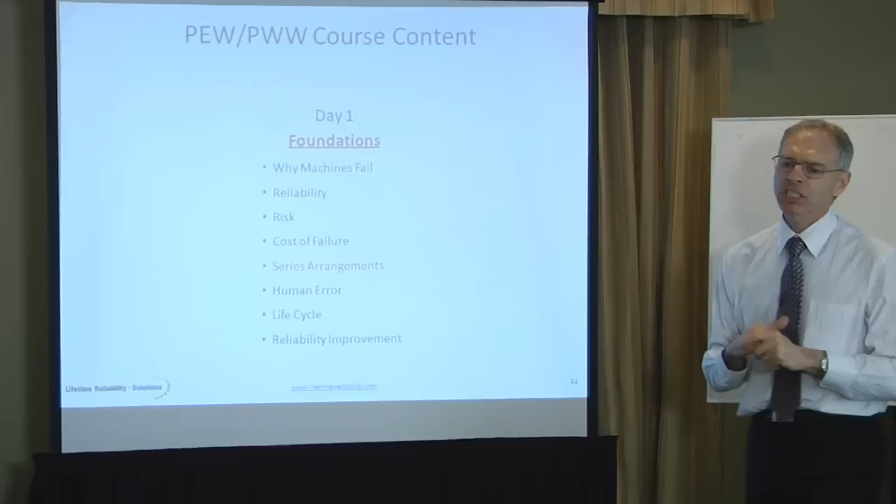I'd like to think that Plant Wellness might do it in 2 or 3 years. That's the thinking in my mind. To have a strategy where when we do these things, the right things are done and they're taught and picked up on quickly, because we can make the change quickly. So that's one of the things that Plant Wellness offers companies, is a rapid change to best practice, and not the 8 years that it can take if things are done haphazardly.

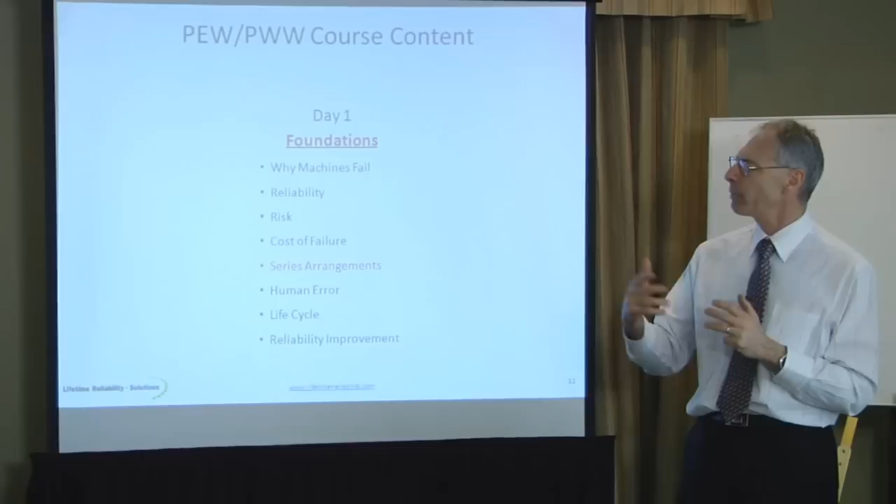This one here is, I guess, an enlightenment to me when it finally sank in, only a few years ago. I'm 56 now. I was 49 when I began to say, well, this isn't working, let me look at some other answers. It's taken me a number of years to get this clearer vision of what we want to see happen. And this one here about series arrangements was one of the keys as to why we are so unsuccessful in changing to good practice at the moment.

So I'm going to talk a little bit about reliability engineering and hopefully fairly simple concepts. This is a series system. A series literally is one thing after the other. So in this particular arrangement here of our pump, for this pump to pump liquid, the motor has to work, the coupling has to work, the pump has to work. I've got a system of equipment, so I've got a series, the whole three have to work. And of course, there's a base plate missing and a foundation missing and hold down bolts missing, so there's more to this system of a pump set to get the whole thing to work, but it's a series arrangement.

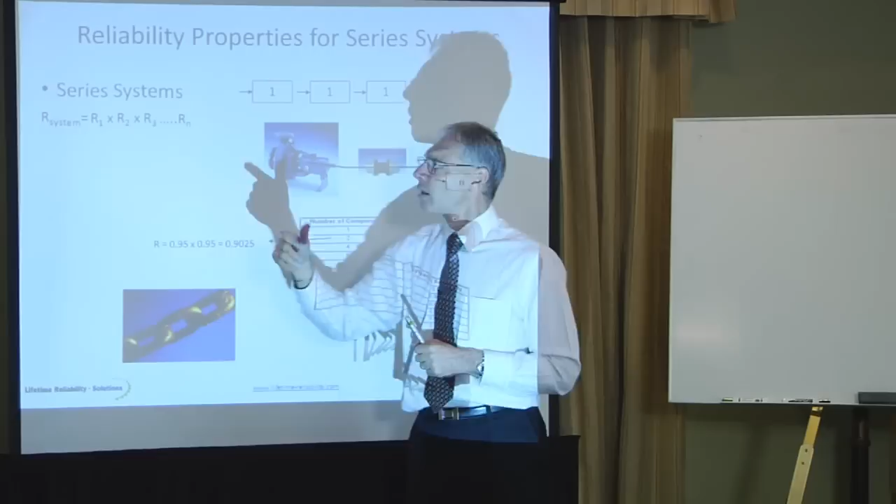Now, the chance of this whole system working depends upon the individual parts. This system requires at least these three to work. So the chance for the system to work is the chance of part 1 working, component 2 working, component 3 working, or assembly 1, assembly 2 and assembly 3. It depends how you want to look at this. I can break this down into components and it'll be the same concept, the same mathematics applies. Reliability, remember, is the chance of success. To have the system success very, very high, I've got to have every single component and assembly in the system even higher, because it's the chance of the whole system working as one that makes the system work completely.

So I've put some numbers in there. As an engineer, numbers tend to clarify things for me. So here we've got a number of components. One component is 0.95 reliable. Which means out of 100 times we go to use this thing, 5 times it doesn't last as long as it should do, 95 times it does. So I roll the dice and 5 times it fails and 95 times it's successful. Reliability is a measure we can get from the historical success or failure of an item of equipment.

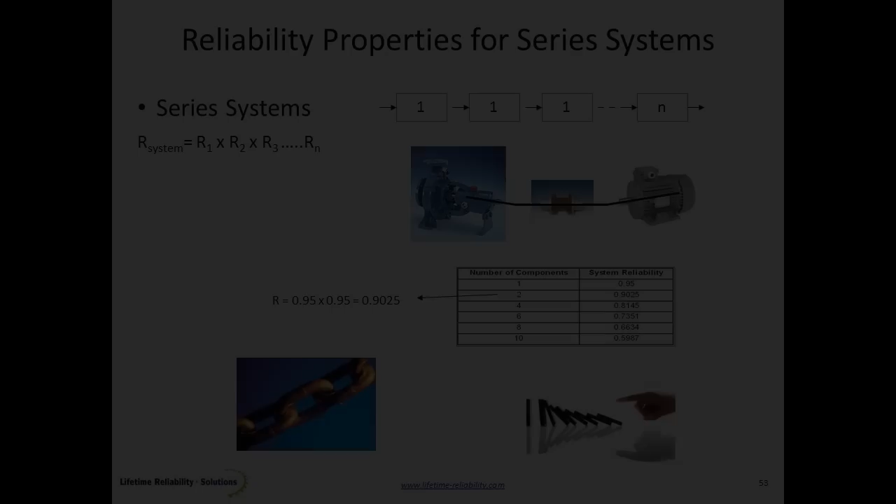When I put 2 together, so I create a system of 2 now, so I need both to work as a pair for the thing to work, now I'm down to 0.9 reliable. So my system of 2 is not 0.95, it's now 0.9. If I have 4 in a series, I'm at 0.81. If I've got 10 in a series, I'm down to 0.6 reliability. Now this can be your production process, machine 1, machine 2, machine 3. It can be an assembly, component 1, component 2, component 3. It can be the parts, part 1, part 2, part 3, part 100 if need be. So the more I string together, the less and less reliable the system is, because any of these can fail.

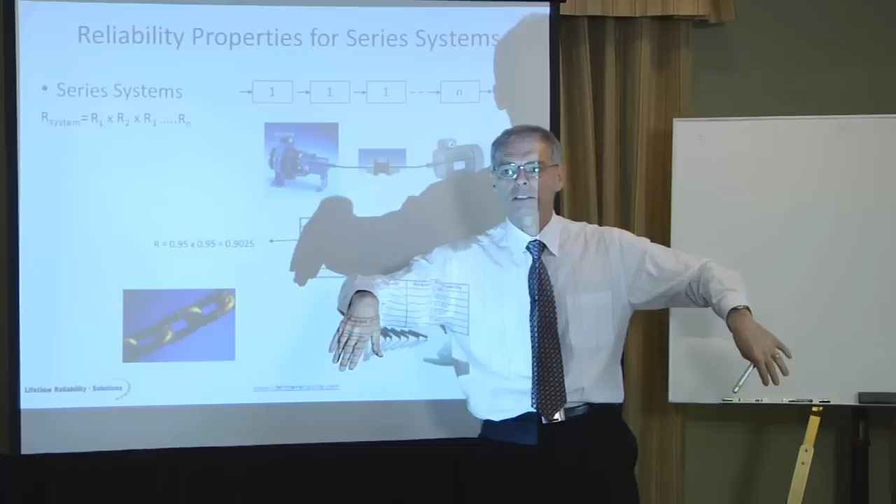Very much like this, my domino: one item fails and the whole system stops. It's a big long chain, links in a chain. One link breaks, the chain fails. Same logic here: if that fails, doesn't matter, it's gone to zero. The whole system is unusable.

Now with a system, there are some properties that are worth understanding. I'm going to work on this a little bit, so bear with me. I'm going to use some maths just to highlight some of the issues. There's 3 key properties that we work with in plant wellness.

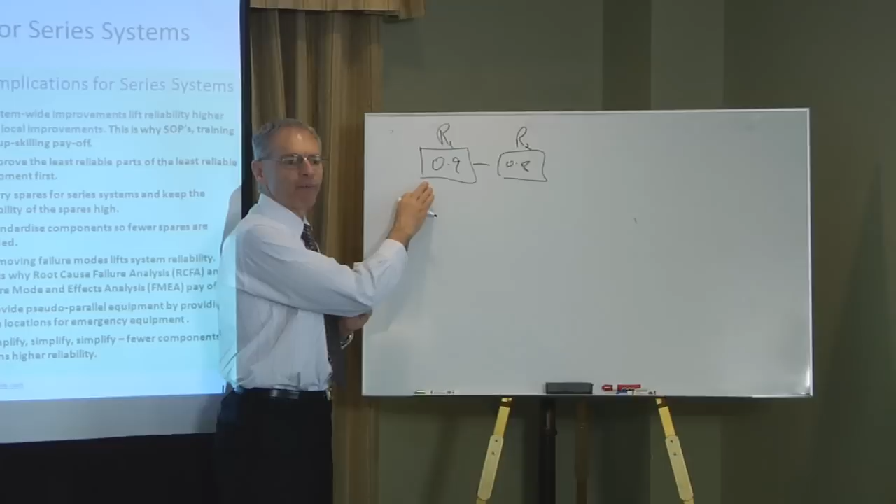The first one is the reliability of a series system can be no higher than the least reliable component. I'll throw some numbers up here: 0.9, 0.8, R1, R2. 90% chance of success, 80% chance of success. That's all it is - it's just the chance this might or might not happen.

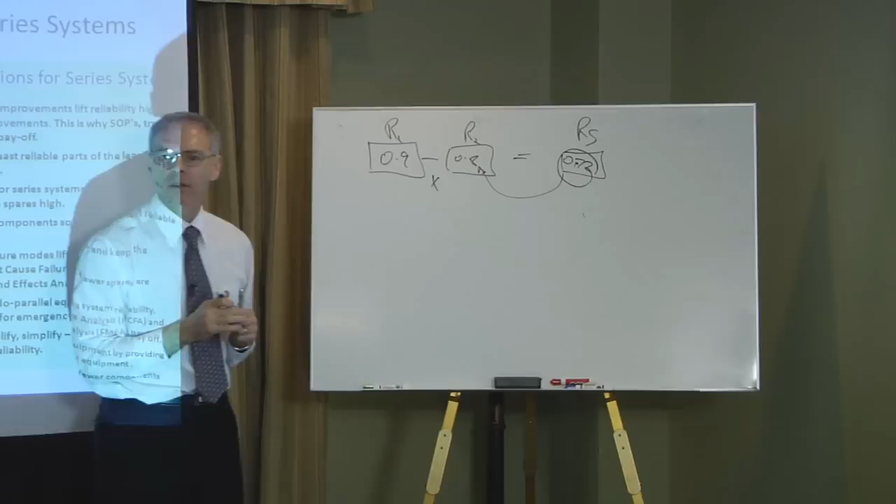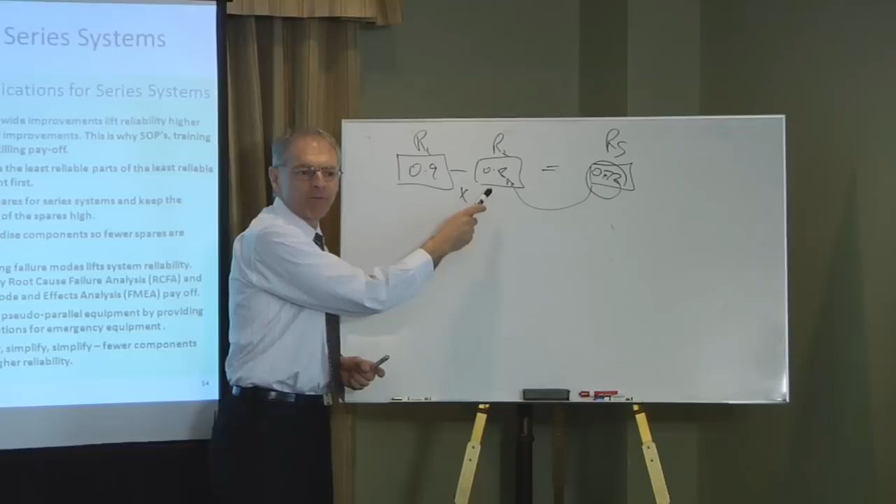So my system reliability is those multiplied together. 9 times 8 is 72, so my system reliability is 0.72, which is no higher than my worst. If I've got a big lot of machinery in my process line, it says to me, if I want to improve my process results, I've got to find the worst performing machine and fix it. Because if I can push this up to 0.9, now I'm at 0.81. Again, no higher than my worst, but I've improved the reliability.

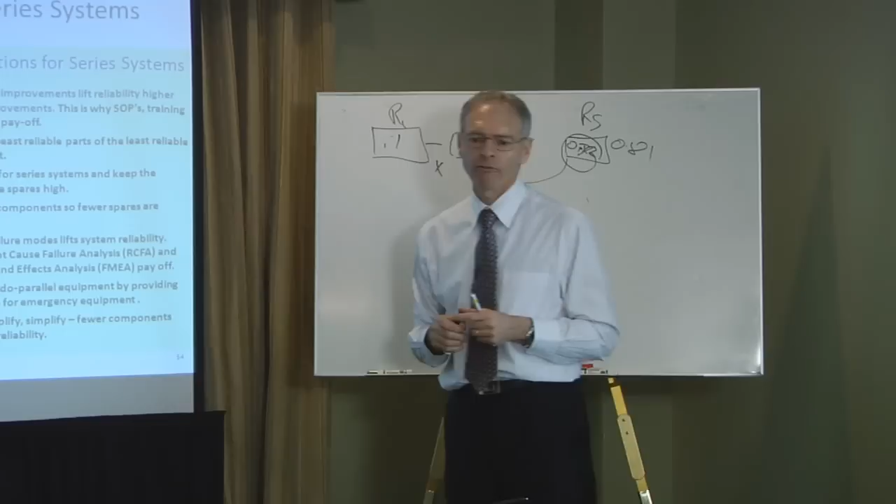So when I do root cause analysis, when I look for a problem in my machines, I want to go to the worst machine, my top 10 worst machines, and work on those to improve the business. Because it says very clearly, no point improving one up to perfect when another isn't touched - I'm going to work on the worst one. So in plant wellness, we go looking for where the worst trouble is, and solve that first, because that is where the payback is for the whole system.

Number 2: if we add more items into a series system - say we've got a system of 2 already, each at 0.9 reliability, and we add one more - the reliability of all items must rise in equal proportion to maintain the system's original reliability.

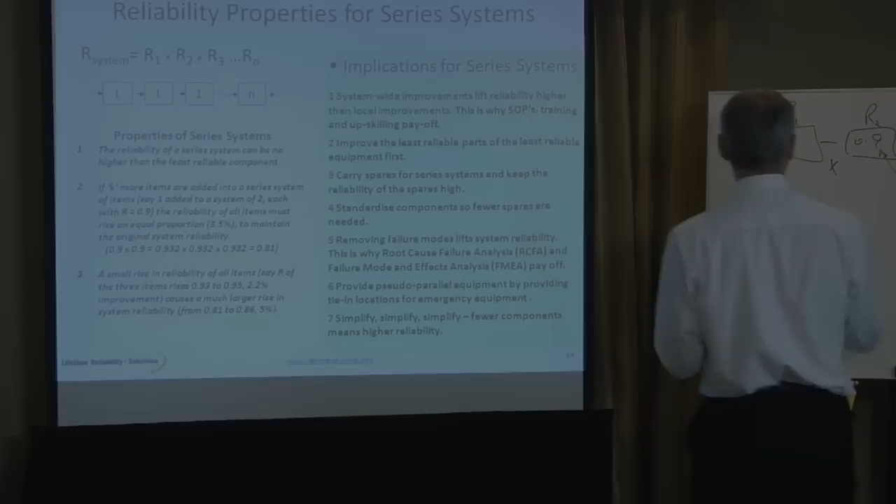So if we have 0.9, and I add in another one, 0.9, my system... 81 minus 7, it's about 0.73. It was 0.81 before. I've added one more thing in there, and as a system now, because all three have to work together, the system has reduced in reliability.

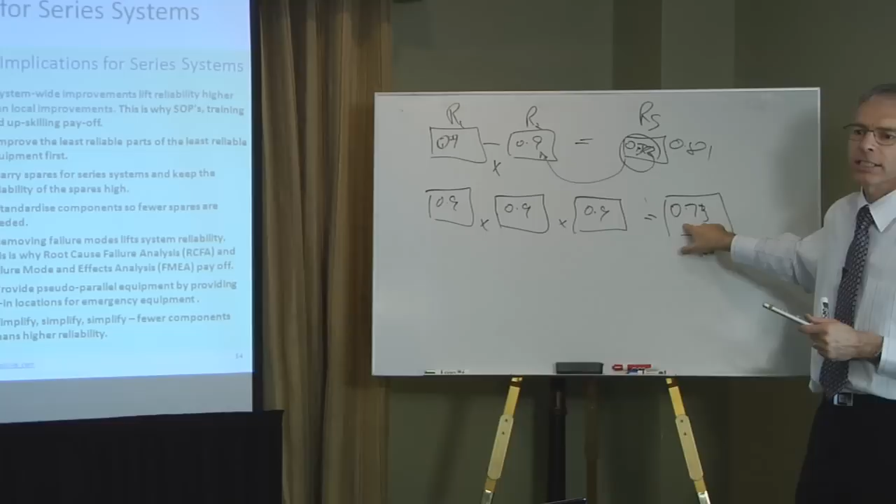If I want to get back to 0.81, I actually have to make all of these 0.93, 0.93, 0.93 to get back to 0.81. So I was at 0.81, I added something into the system, it dropped reliability. Now to get back to 0.81 where I wanted to be in the first place, I've got to lift all of these as well. So I don't want to be adding things in - if I add things in, the chain gets longer with more links, and of course they're going to fail.

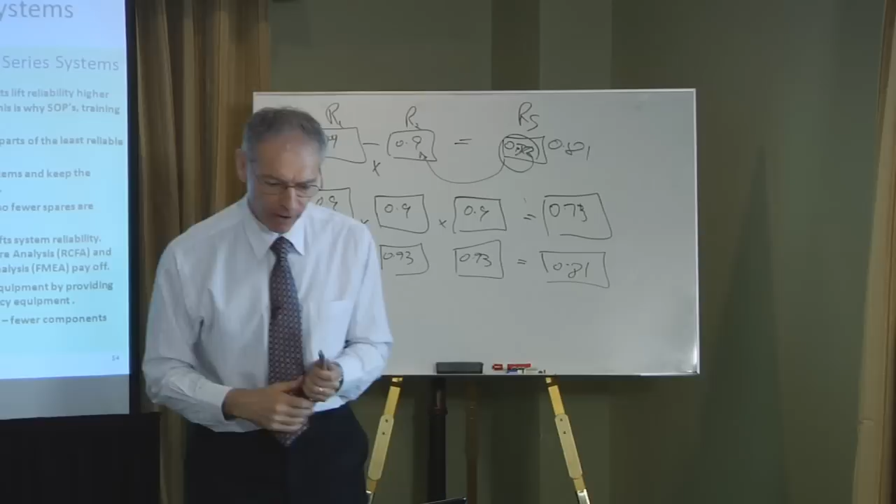I think if I can go to the next... no, I haven't got that one there, wait a sec. No, haven't got that, that's okay. That's one of the slides I might add into this example.

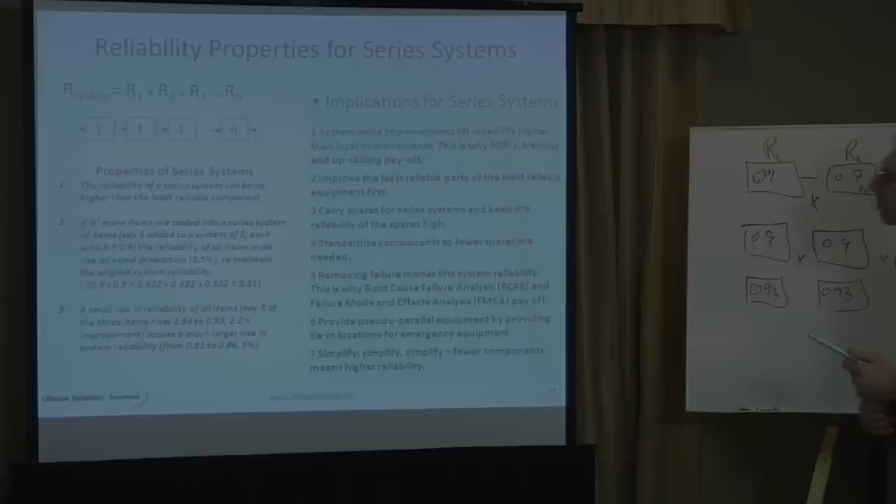The third one is the one that's really, really interesting. A small rise in reliability of all items - say we're at 3 items at 0.93 and we go up to 0.95, we can lift each up to 0.95 - causes a much larger rise in system reliability.

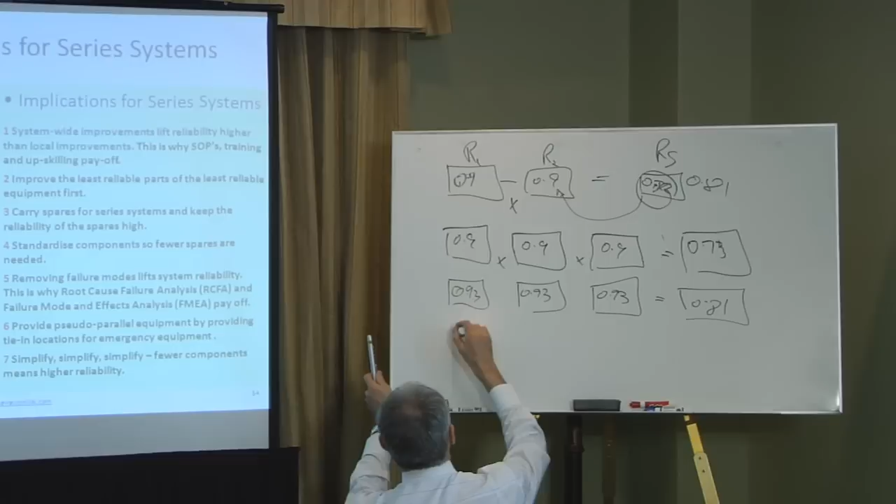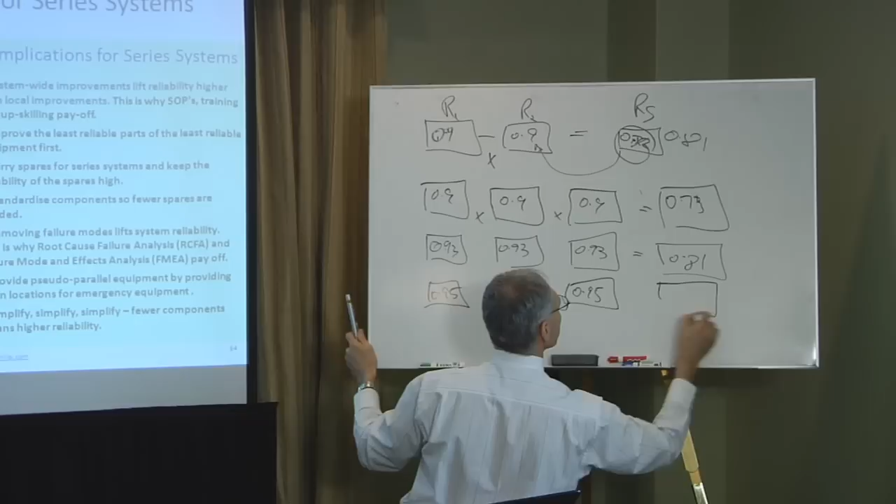Now bear in mind, I have no idea what causes this reliability to rise - whatever it is that improves it is good to do. If we can go 0.95, 0.95, 0.95, if I can make that happen, increase reliability, then this one here goes to 0.86.

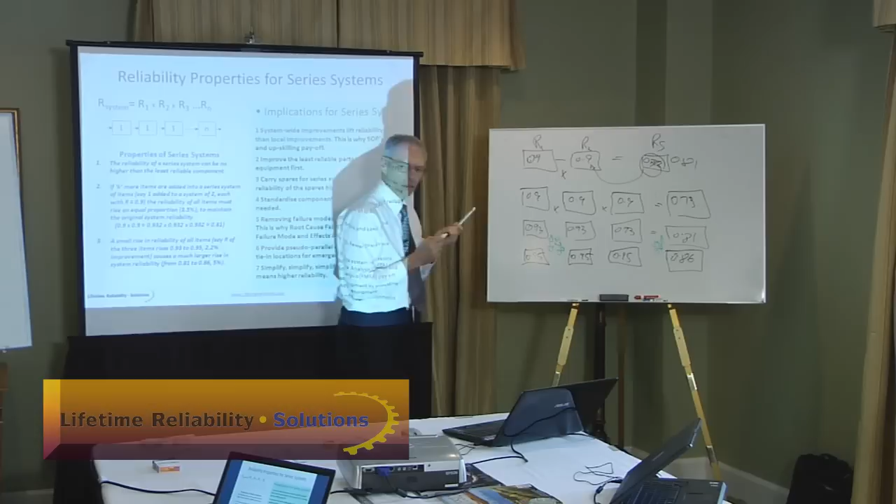This change is 2.2%. This change, I think, is 5%. Yeah. It says to me, hey, there's free money here. I put in 2.2% effort, I get 2.5 times return.

Because I'm changing the entire system as one complete unit. And the mathematics is very clear - this isn't me making this up, the numbers are very clear. The proportionate rise at the individual component level is much less than the total delivery of the system.

So the system improves a huge amount if I can create a global change. If I can create a global change across my company in one fell swoop, I will make absolute fortunes for very little effort. The question now becomes, what are the global changes we can do that will do that sort of thing?

Well, let's introduce precision maintenance. In the boardroom, the CEO's there with these execs, and we all say, guys, the company's now going to introduce precision maintenance. We saw before, if things are unstressed, if the stress is right down low at very low levels, we're going to create reliability. We're going to have far more cycles to failure than we had before. So the boardroom now does that, a global change. Let us introduce lubrication management.

Every single gearbox, every single differential, every single hydraulic system, lubrication management. We're going to have world best lubrication management practices. Global change. Everybody gets trained up into proper lubrication management practices, good storage, no water contamination, removing wear particles, getting right down to very high quality conditions. So that decision across the years, every gearbox is protected, every hydraulic system is protected, every differential is protected, all by decision. So this is the stuff that plant wellness works with.

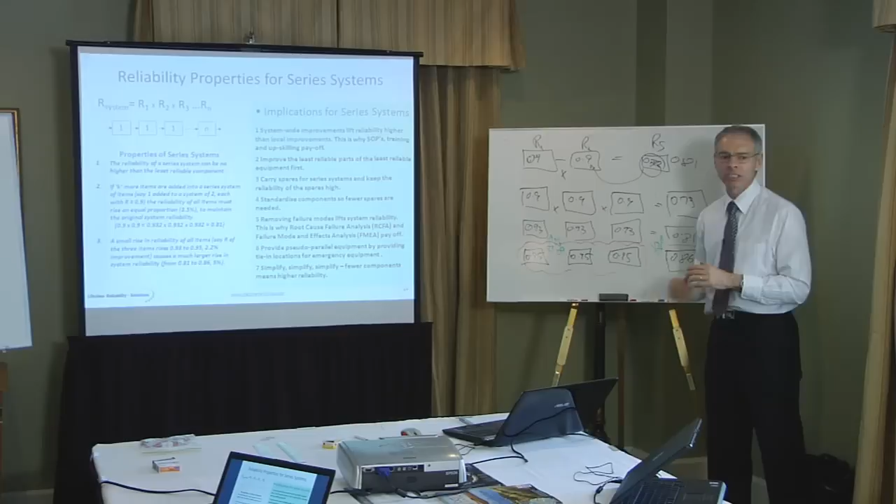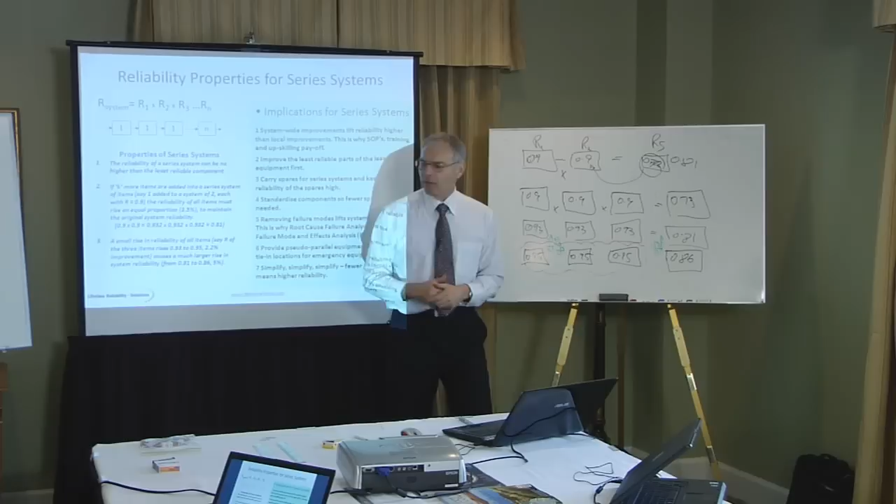Stop doing things that don't work. Do the things that do work. Teach your guys to do the things properly, correctly. Buy the machinery in, buy the instrumentation if you need to, because the payback is a fortune very, very fast. So yeah, that's something that didn't come to me until I was 52 years old, until I began building the course and began playing with what this plotting actually says.

In a series process, we have huge risk. Because if that goes wrong, system fails. That goes wrong, system fails. That goes wrong. I've got hundreds of things to go wrong. And I want to have none of them go wrong. How do I ensure none of them go wrong? Bring in world best practice across the whole operation. Then I'm going to get the right things happening, and the right things happening give me the right results, and the right results give me a lot of money. Thank you very much.

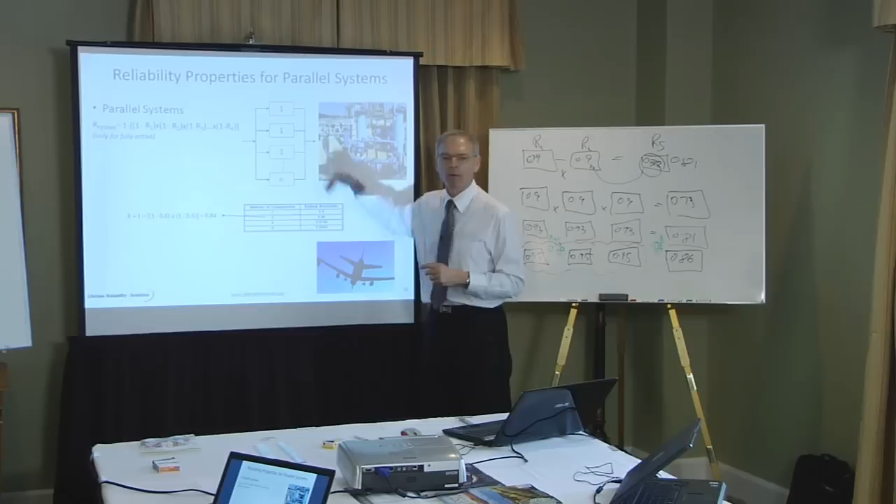The other way we have reliability is to have things in parallel. So in a parallel system, here we go, we've got a standby unit. So what we do in parallel is we have standbys. So in this case here, that one can do the whole job. If that one fails, that one takes over. So I have a backup. And in many process plants, you'll have standby pumps and standby machinery on purpose, knowing that if one goes down, we start the other one and the process keeps on going.

So somebody in the design phase thought about the concept of availability and the cost of downtime and said, no, I can justify putting in a standby because the risk is so great if we don't have it there. Now in this case, when I have a parallel arrangement, and again I throw some numbers in there because it's easier to see with some numbers. Here, 0.6 reliable. So one item is 0.6, and 0.6 is a disaster. 0.6 is absolutely atrocious. But I put 2 together, now I'm 0.84.

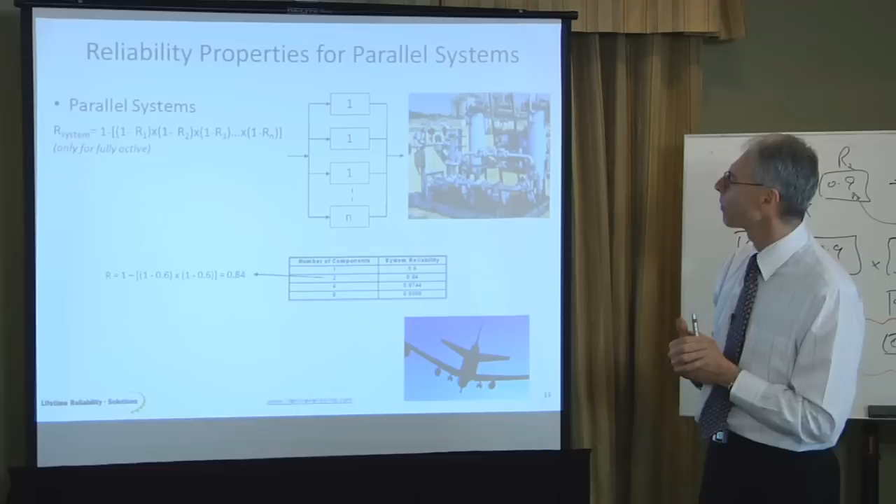I put 4 together, 0.97. I put 6 together, 0.996. So I can improve reliability by putting things in parallel. In the end, there's only 2 ways to improve reliability. One is to do things in parallel. The other way is to have each component very, very high reliability. And that's limiting, I guess, because there's not many things we can do to play with reliability. There's only a few options. Again, there's some things that come out of it in terms of basic implications.

We use parallel activities or parallel arrangements when the consequence of failure is high. When the risk is high of one item failing, we put a standby in because it pays for itself. It reduces the chance of the process going down.

We'd like to have things in parallel because it gives us options as to how to complete the process. You know, that machine goes down, that's okay. I can run it through this machine here. I can still stay in business even though I lose plant. The only hassle is that costs money. Now I've got to buy another one, maintain it, and keep it in good condition.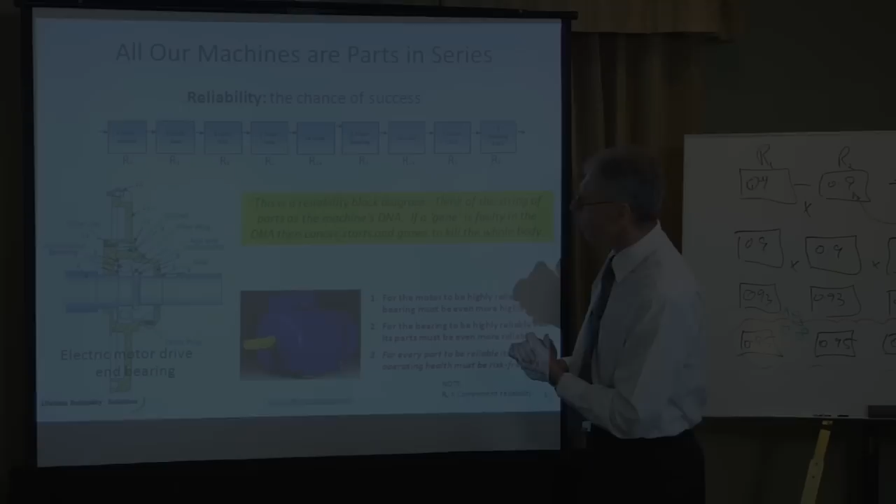Now what I've done here is I've taken the drive end bearing of an electric motor and turned it into what we call a reliability block diagram. It's a process chain. Power comes through, there's a shaft journal involved, there's a shaft seal involved, there's a lock nut involved that keeps this thing working properly. If that lock nut comes off, we're going to have troubles with that shaft moving up and down. There's an inner race on our bearing.

There's the lubrication, of course, between that inner race and the element. We have a rolling element, in this case a ball bearing. And again, we have lubricant on the ball bearing to the outer race. There's a housing bore. The housing's on the end cap, the end cap's on the frame, the frame's on a base plate. There's a whole chain here that I haven't actually put in there, but it's there. That might be, in the end, 50 components long.

That fails, that goes down. This thing's driving my prize machine, the machine that makes money for the company. I'm out of production. If that goes down, same story. If that goes down, same story. So if I've got 100 of these things in line, any one of which goes down, my machine goes down, my process goes down, business goes down. I have to watch out what causes these things to fail.

And that's why we focus so much on part reliability in plant wellness. I've got to make sure each of these is really, really high reliability. Lots of nines in a row, because that is the only way to ensure this thing will survive 25 years trouble-free. So if this fails, and I'm down and it costs me $2 million a day, I can afford to pay for some maintenance.

So now I've got to say, well, how can my lubrication fail? And we go back to our table of the way things can fail. We can say, well, here are 15 ways to destroy the lubrication. Let's make sure that none of those happen in this company. Let's introduce the best practices to prevent that from happening. So these best practices pay back because lubricant is now safe and in great condition.

My lock nuts never come loose because we put them on right and we double check they're right. My shafts are always straight, always in alignment. There's no banana bending because they've got a soft foot problem. So that's the whole point of having a reliability block diagram. I want to draw our machines like this. I want to draw our business process like this, because if any one of those fail, the business is in trouble.

So I want to begin asking, what can cause my rolling element to fail? What can cause my housing bore to fail? Well, if that's machined incorrectly on day one, the manufacturer made it out of round, then I've got to start controlling my manufacturer's quality control too.

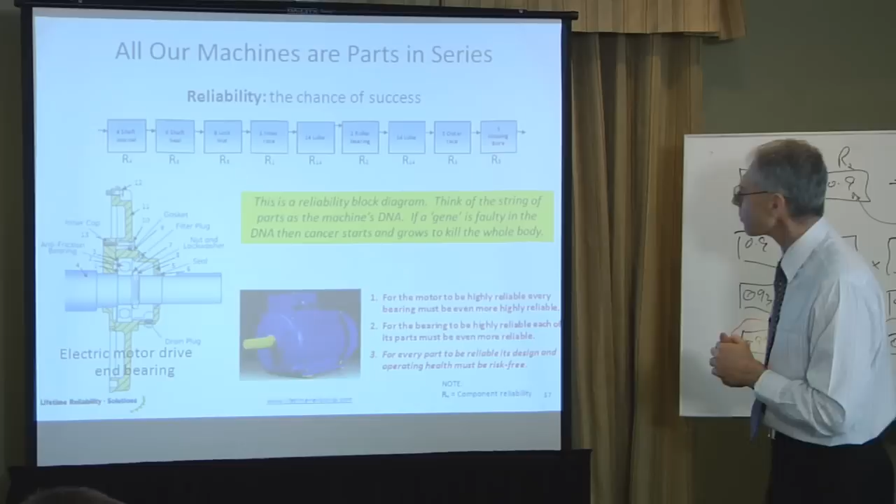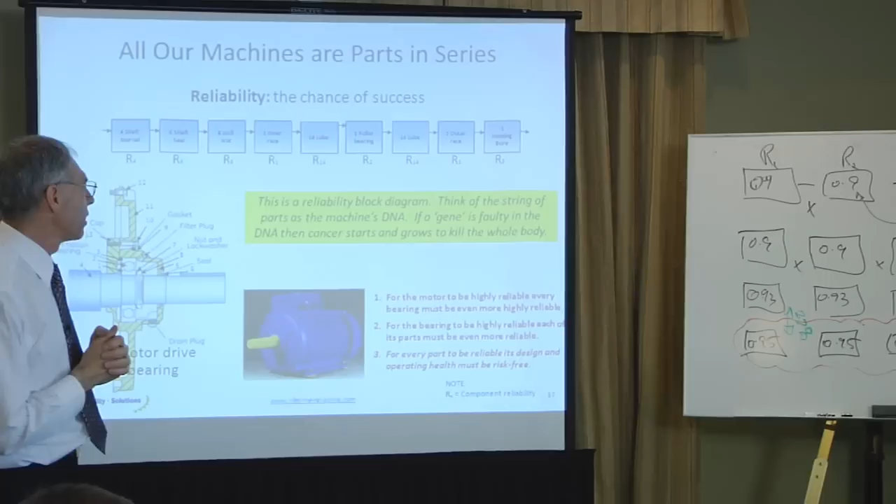Now, one other thing this does for us: this is actually the DNA of your machine. If you draw a reliability block diagram of your whole machine, that's a string of its individual genes. Each item's like a gene on our DNA. I call it a reliability block diagram, but it's just a process flow diagram, boxes and arrows. So wherever I see this string of arrangements in any machine in my business, whatever works for this particular arrangement will work for that machine and this machine.

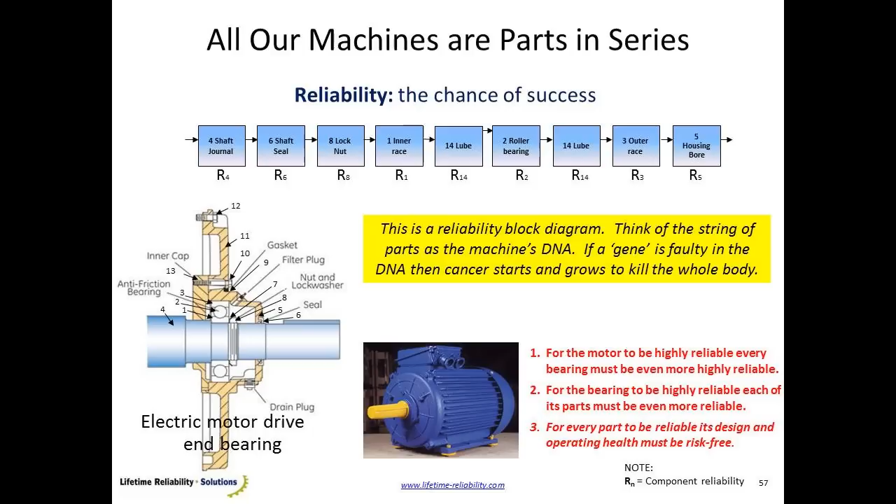So in plant wellness, what we do is we have a look at one bearing. How do we ensure one bearing is highly reliable for 25 or 30 years? And then whenever I see a bearing, I'm going to do the same thing again and again. So I don't analyse every single machine in the plant. I analyse the assemblies. And where the assemblies repeat, I just take that same solution into this new machine. So we try and do the analysis logically and as smart as possible.

But the whole point is, once I draw my machine up like this, or my process, or my production plant, then I can begin saying, what loses reliability? What will cause the problems? Where does the risk come from? How do I manage that risk? And then we put those things into play.

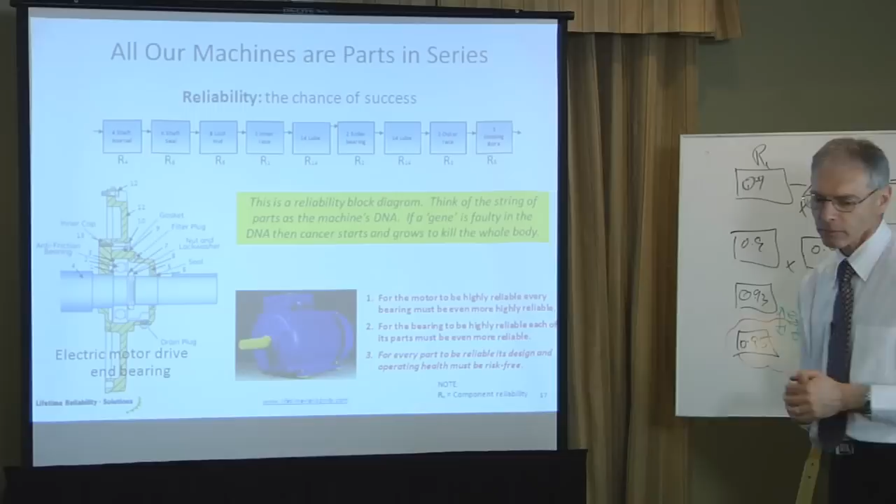Now here's a job. And guess what? With our jobs, we have the first task and the second task and the third task. So with our jobs, we also have a series arrangement. So if I want my job to go right and I fail that task, the job can't go right.

Now, the machine will go. I press the button and it'll turn. It'll work for a few days when it could have gone for a year trouble-free. So, yeah, we can make machines work, but they should last trouble-free for their life. And if they don't, then it's because something's been amiss in possibly the repair process or the operating process.

So the whole point here is our jobs are all series arrangements. Our machines are all series arrangements. Our production plants are all series arrangements, which means any link in the chain will fail the business.

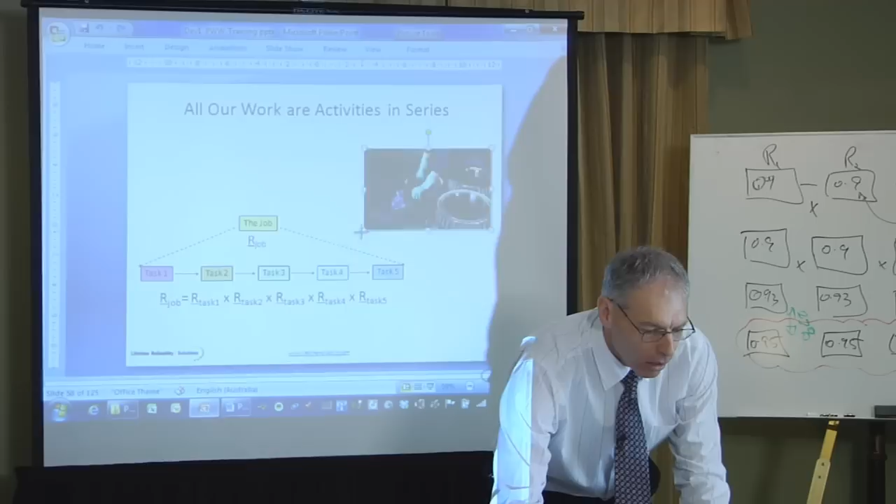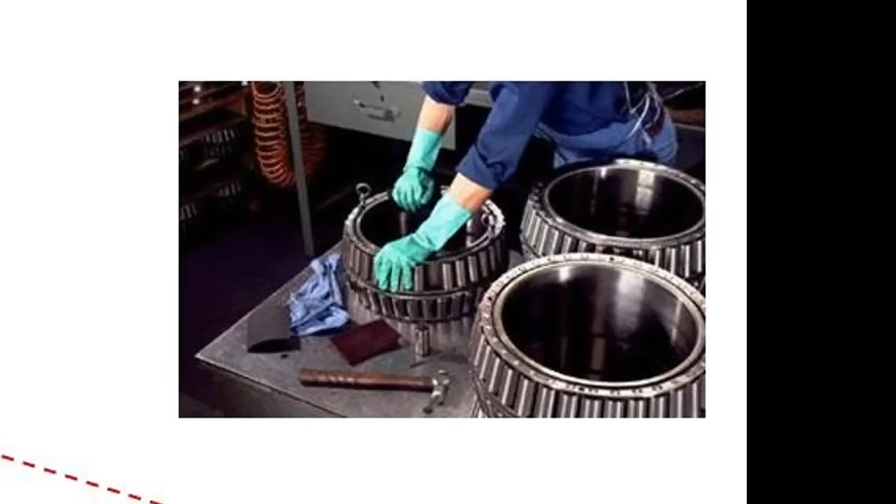Now, whenever I bring this slide up, I always challenge people to say, are you happy with what you see there? Is there anything in that picture that bothers you? I see a hammer, that bothers me. Yeah, a hammer and a roller off to one side there. So I suspect he's knocked the roller out with a hammer. These bearings, of course, are precision machines. They're down to sub-microns in terms of perfection.

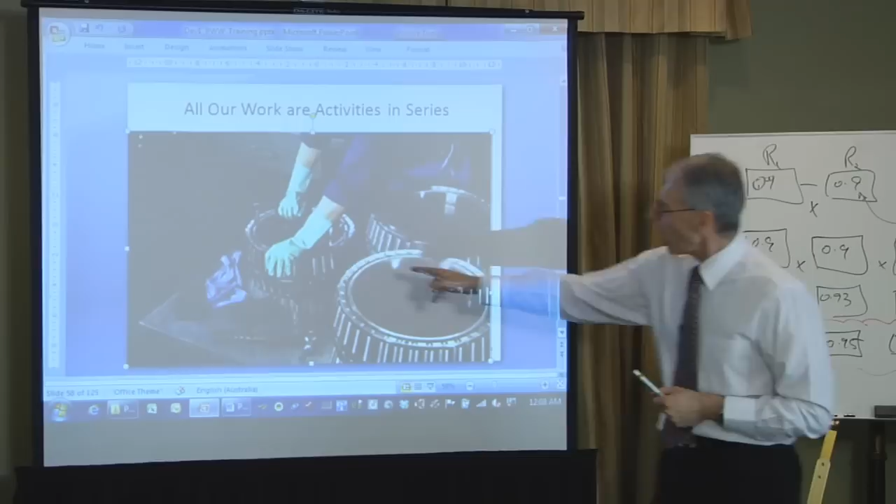There's emery cloth. I suspect he's polished the bores. Now, the interference fit isn't the same any more. And his gloves, that emery cloth he's used to polish and all the fine particles that got rubbed off by the emery are now on these gloves. So he's going to move that rubbish across all his bearings.

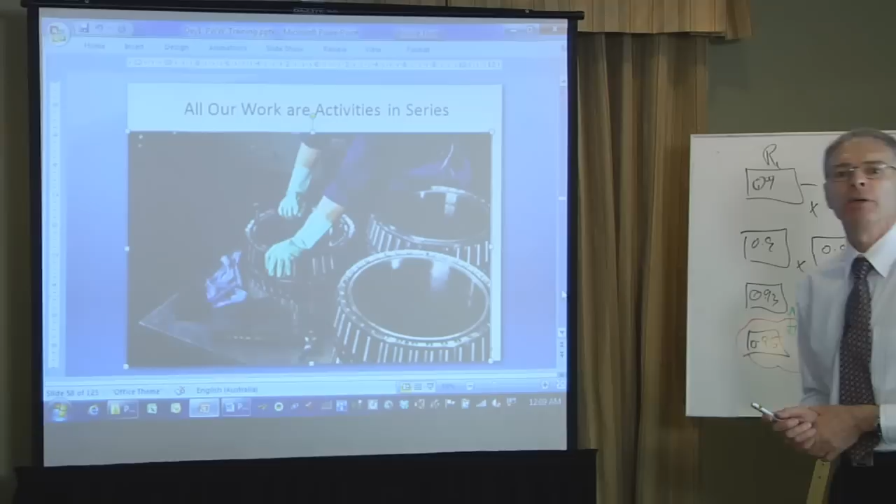What else do I see here? I see an air hose. I see down here bearings waiting to be used or perhaps rebuilt. Hang on, so if he blows down all this rubbish he's put on here with his gloves and it gets blown over to these bearings, and these bearings go into the machine they're being rebuilt for, then that machine's going to fail from the wear particles, because he used emery to clean the bore.

I was taught to do this. This is how I was taught to maintain bearings in my trade. I was an engineer. As a maintenance manager, maintenance engineer, I would walk through countless workshops and walk straight past this. This company is failing its own machines because this practice is destroying the bearings that were going to those machines. So the company practices are leading to the company's machine failures.

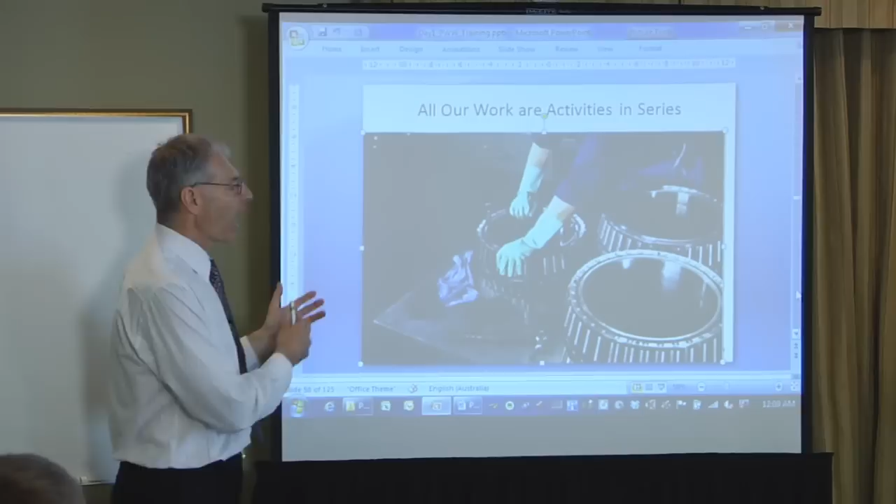So companies, in my eyes, are breaking their own machinery. They're failing their own machines, because if they're doing rebuild practices as this picture is showing, then it is going to naturally cause a failure. This is a process choice. Some manager in this company chose to repair bearings in this workshop in that way.

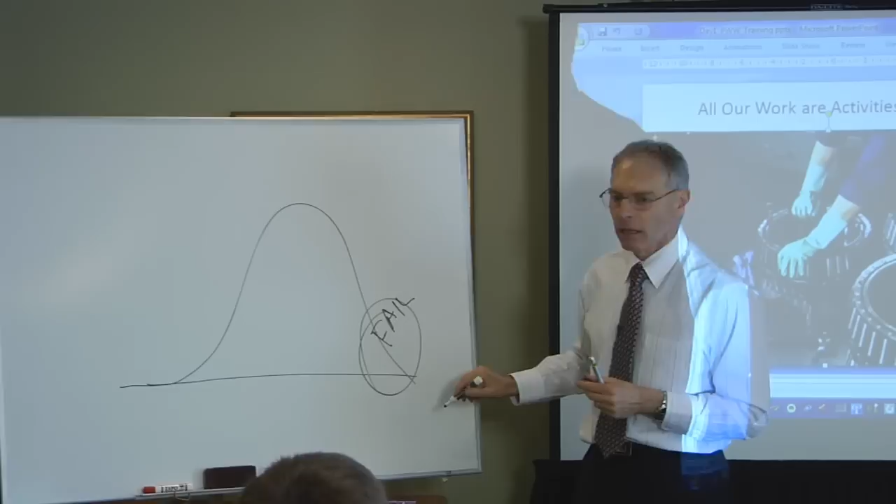It's a process choice. The process outcomes are then going to be on a distribution. That process will have a distribution. It may not be normal, it might be something else. The point is, over here is failure. And they will have failures because of those practices. It may not happen on every machine, but the practices will create a chance of that failure occurring.

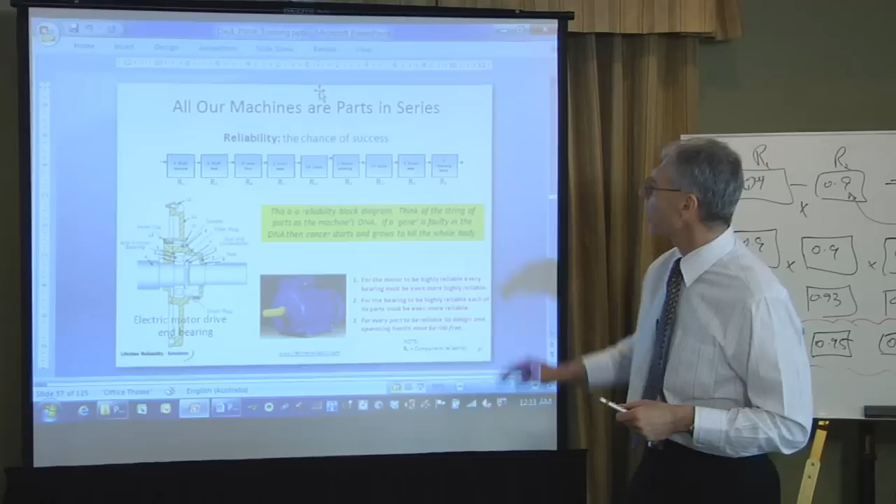Like I say, all my career, that would have been okay to me. It wasn't until I began looking to see what makes this part reliable. How do I keep this reliable and that reliable? I began to look and say, you know what? That's impossible. If I adopt these practices, I cannot have high reliability in my plant, because they are failing the parts that make the machine go round.

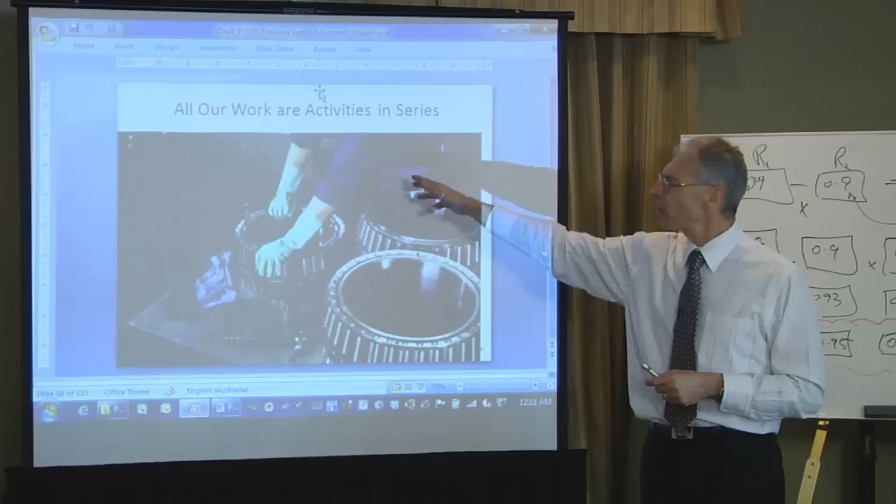Then I began to think, well, what does this mean in terms of the company and its management and its engineers and its supervision? Because this poor fitter is just doing his job. It's what he's been taught by his previous trade people, and what he's been taught at trade school. And the engineers that go to that workshop don't see it either. So the engineers don't know they're destroying their own plant. The supervisor doesn't know they're destroying their own plant.

The supervisor in charge of this guy doesn't know this is going to cause his machines to fail, because if he did know, he would have stopped that. Engineer doesn't know, supervisor doesn't know, manager doesn't know, and the CEO sure as heck doesn't know.

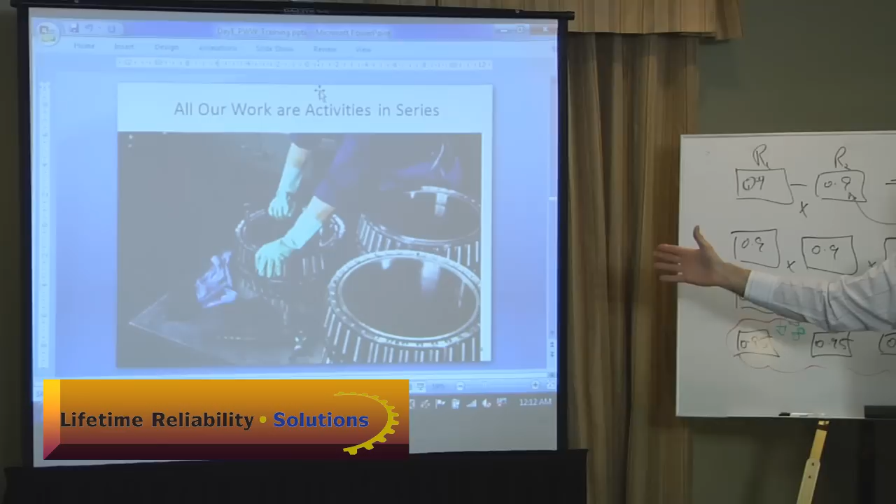And I was the same until I was 52 years old. I've been an engineer for 20 years, and I'd walk through that shop and it wouldn't bother me at all. And yet, this company destroys its own machines, and nobody in the company even sees it.

So if you go to a shop and this is what you see, then they are failing their own plant. And it means changing from a culture where it's breaking their machines to a culture where it's a clean place, proper practices, proper gloves. That's a totally different world.

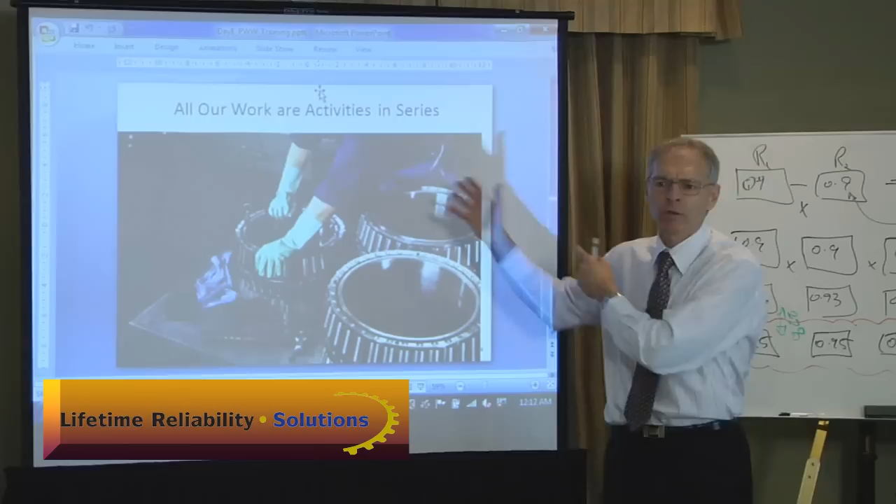This guy's been taught from trade school to do it this way, and his bosses have as well. And it's been wrong from the beginning, wrong from day one. And we've got to change that. Got to change that, otherwise nothing will improve.

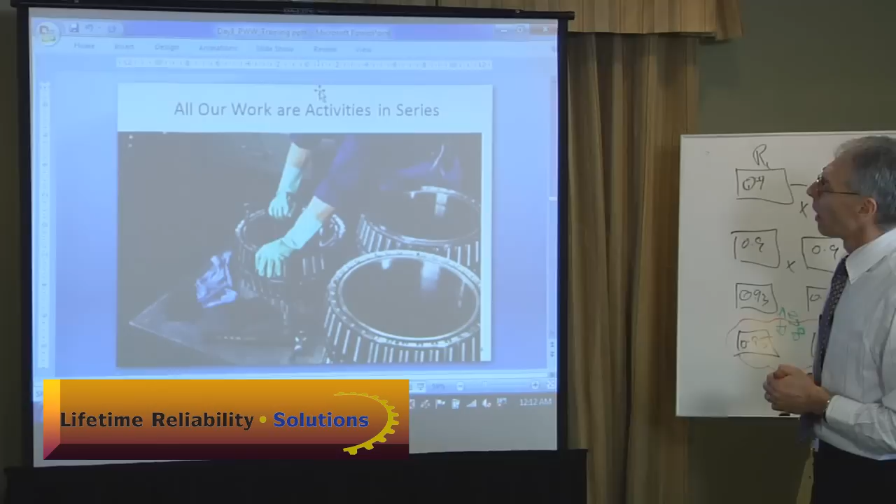Can't improve, because the process they're using causes the failure. I've got to change the process. And if that means changing a culture and changing their training and going to a different school to learn, that's what it means. And that'll have an effect, a global effect now.

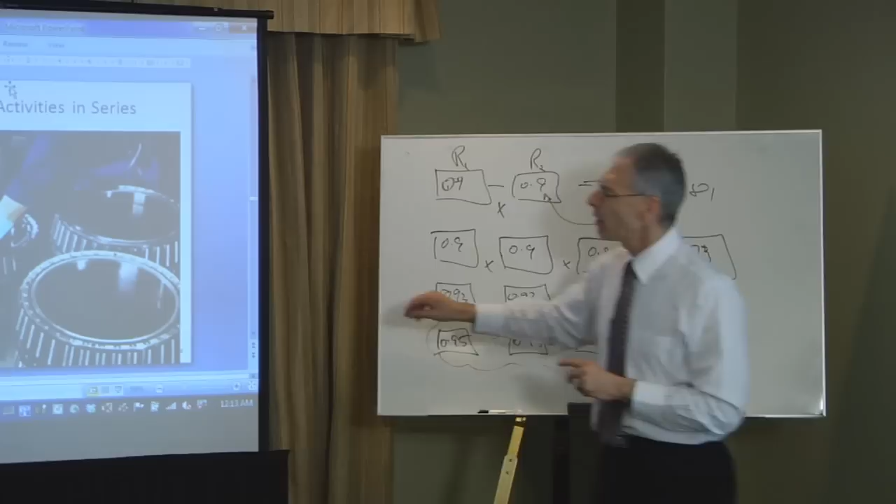Better practices, more knowledge, more understanding, it's a global effect. If I train my guys to look after all their bearings properly, then all the machines improve over the coming years. So I'm going to create reliability with better practices and better techniques. That's going to come back to me as a lot of money made very easily. That's how it'll go. Yes?

I wonder what the management and the engineering department thinks is causing their machines to fail. They think something is. Remember, a bearing's designed to be underneath the infinite stress zone.

A bearing should never fail in the service life of that machine. That's how it's designed. If it's failing soon, then it's being stressed from something. Something is causing it to fail. It's not natural, something unnatural is happening to it.

Now, if they can think that way, what is causing it to fail, that's a huge step forward. If they can at least ask that question and look for evidence, that's a huge step forward in their thinking. I think the risk matrix has to come into play here, because I believe most CEOs and managers, vice presidents at companies accept the fact that bearings fail. They accept it, it's part of the risk that is acceptable to them.

They need to be shown that this is unacceptable and what the value of it is. I believe that, I think that's how I saw it too, I must admit. And to me, you've got to be a businessman. You've got to have a businessman's hat on, and that's the best way to think.

The engineering is great, the reliability is great, but you've got to have a business perspective, and you've got to talk to it in their language. And if we engineers can't talk business language, then we're the ones that need to lift our game. Because if we can explain things and show, well, this training might take a year for your crew, it might take $100,000, but after the training you're going to win back $10 million in the coming years, it's not too hard to make a business case.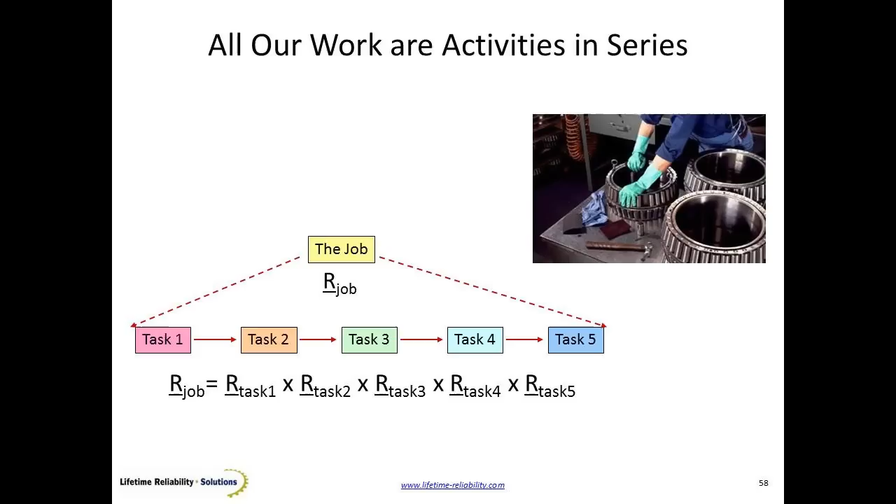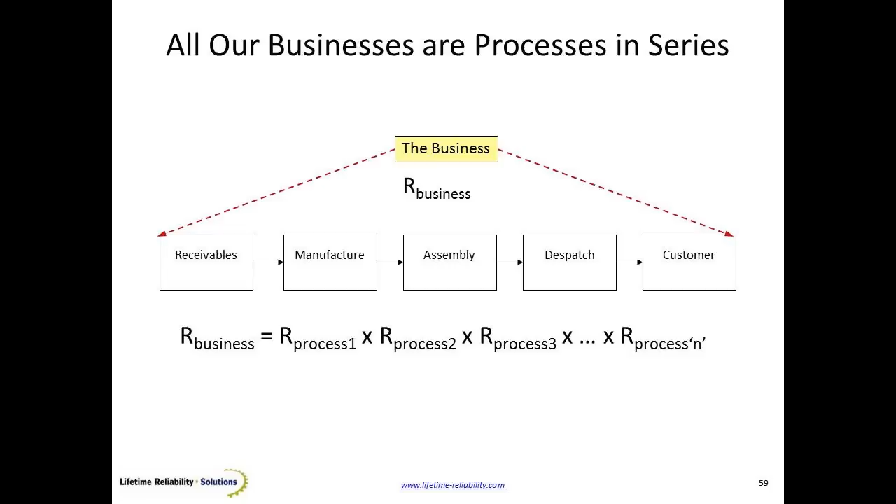So this is how our tasks fail our machines. And of course the business is the same. Business has a bunch of processes that start at one end and go to the other end, and out pops the product. Your business reliability, chance of success of your business, depends on the steps and processes in your business. So it's how our world is made. Our machines are that way, our work is that way, our companies are built in series processes. And they're high risk solutions, high risk outcomes because they're a chain. They're just links in a chain. I lose it there, I lose it here, I lose it there, the business suffers.

Now this is what I put on the board there. I just threw some numbers in, and I won't go through this because it's pretty much the same story. Here we have our series process, property number 1, and we talk about we want to improve our worst one first. Now that improvement in this case is 12.5%, and the system improves 12.5%. The system will never improve more than the individual improvement.

Now, typically what root cause analysis does is look at a problem, solve that problem. Biggest mistake in the world. If you solve one problem on one machine and you only fix one machine, then what you've forgotten to do is take the global idea into your solution.

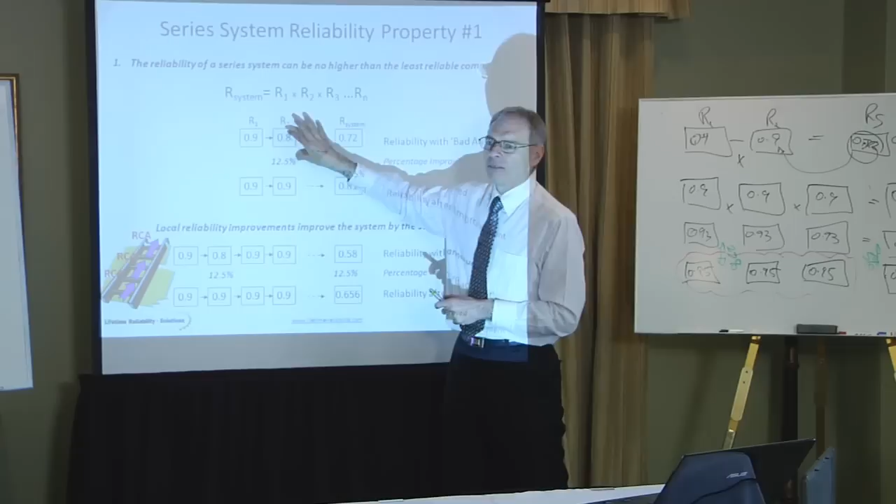Because if one machine fails, then wherever that arrangement of parts appears in any other machines, they are at the same risk. So if I improve one machine's assemblies with a better strategy, that concept, that improvement should go across every single machine, across the whole company. Then I'm not just fixing one part in one machine, I'm fixing every part in every machine that has the same arrangement of parts. Now I'm applying a global solution, I'm applying a global strategy.

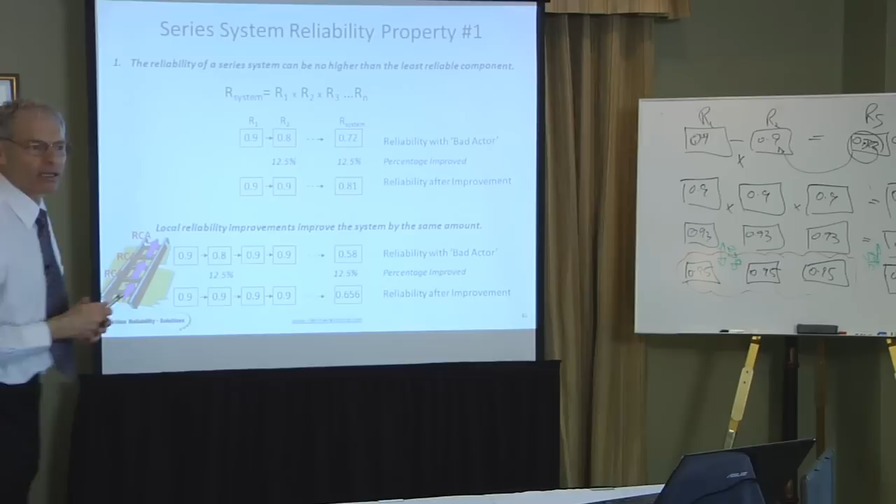So if I use RCA to fix a machine, I get a small improvement. If I use RCA to fix all the machines from the learning of the RCA, now I get a huge improvement from one RCA. A lot of companies don't see it that way. They just fix our dog machine, get the dog working properly. Unfortunately, every other machine's at the same risk because that's the way they run their business.

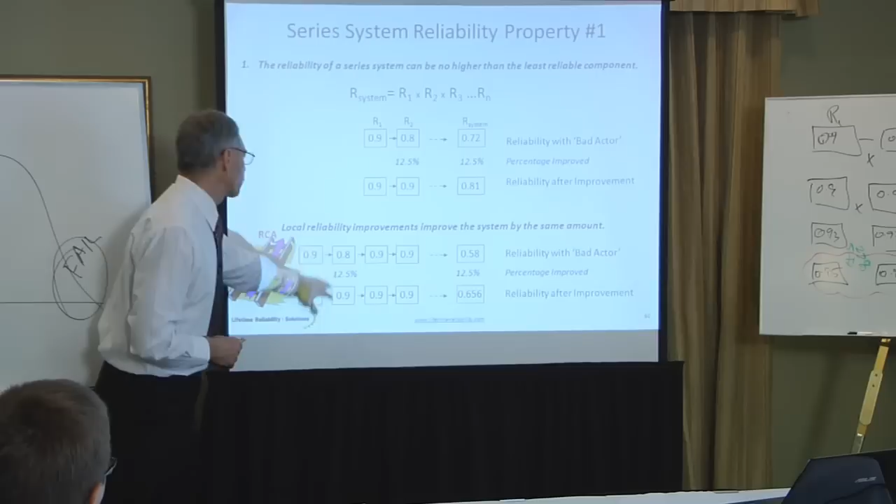This one here was if we add more things to our series process, here we go, we add more components. That was just localized reliability improvement only focuses on that local solution, which is what I was just explaining there. Here, if we add more things into our series, we have reduced the reliability of the whole series, which we've already seen.

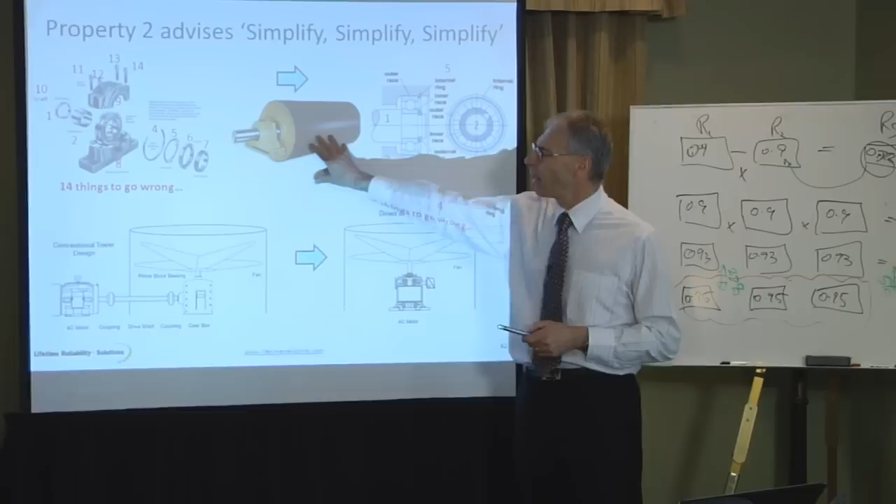Now, property 2 is about simplification. Don't add things into your processes. Remove things, bring things together. Here's an example of the sort of stuff that it means. This particular arrangement of bearings and pillow block is what's on the end here of our head pulley. In Australia, in the mining game, thousands of these exist, and they're typically built just this way here. When you look at the assembly of our bearing, what we find is there are 14 components that are used to make up this drive end here.

The other way to design these things is to design them like this. In a housing, this arrangement here, 5 components. So there are 9 more ways, 9 more things to fail in this arrangement than that arrangement here. And because there are 14 things to get right here, it's very, very hard to build this thing right. To build this thing correctly is a huge challenge for a technician to do. Whereas this one here, much, much simpler. So when it says simplify, it really means that. Get from complicated stuff to simpler stuff. If you can do that, then you are removing opportunities for error.

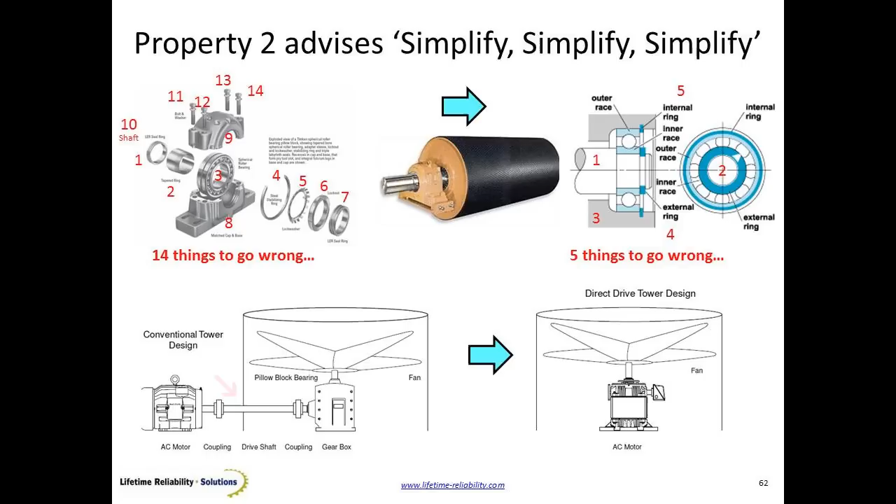Another one here is with technology improving these days, we can put a VSD, variable speed motor, on our drive directly. So get rid of a motor here, our couplings, our shaft, and a gearbox. So I go from 5 items down to 1 item. If I can do that, I have 4 less things to go wrong. To get that shaft aligned across that distance is very hard, demanding, challenging stuff. So I've got chance of mistakes from human error, as well as more things to go wrong from many more parts to fail. So number 2 is about simplifying. Make your process shorter and tighter and less in length.

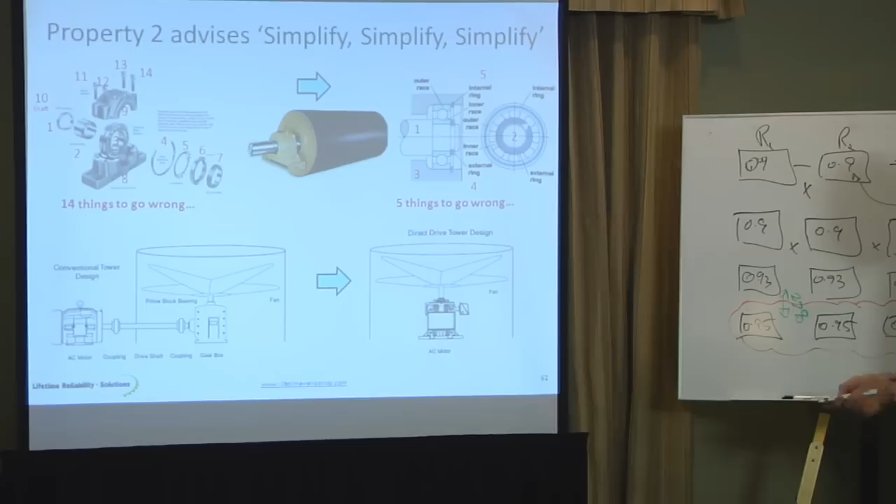Number 3 I've discussed already. It's this story here: bring in best practice, bring in global change. So best practice, every machine benefits. If I introduce lubrication management, then every gearbox is going to get lubrication managed properly. It might take a number of months to go across every single machine, but in time, if I have best practice of alignment, lubrication management, interference fit control, temperature management, then that goes across every single item in the plant. So in the coming months, my best practice improvements go globally across the business. As a consequence, the system improvement is vastly more than the individual component improvement. And I have confidence this is right because these are purely the chance of success. If I increase the chance of success, then the outcome naturally follows.